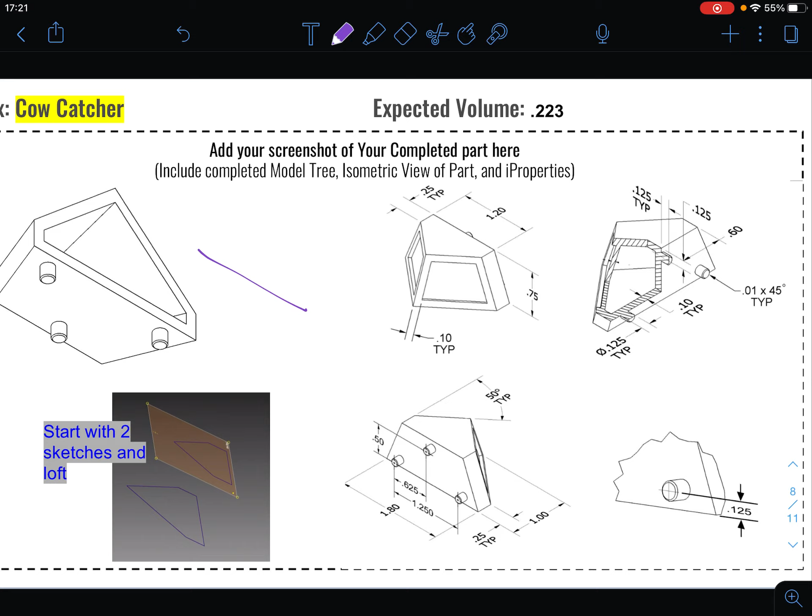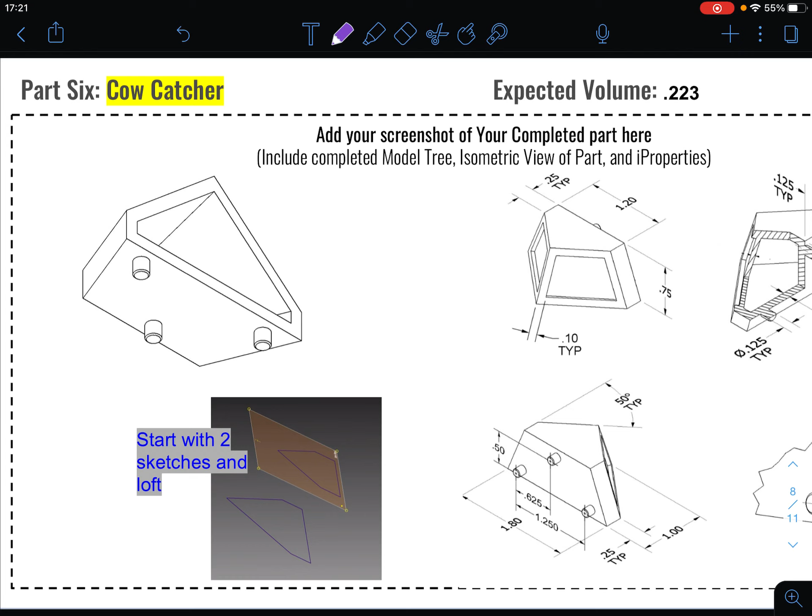Hello, future engineers. In this video tutorial, we are going to be going over how to model part 6, the cow catcher, inside of Onshape. There are other Onshape videos posted to the Google Classroom, so if you have questions about using Onshape, I'd recommend looking at those. I'm going to try to go through this one as quickly as possible because it's a bit more complex, so I want to keep this tutorial bare bones.

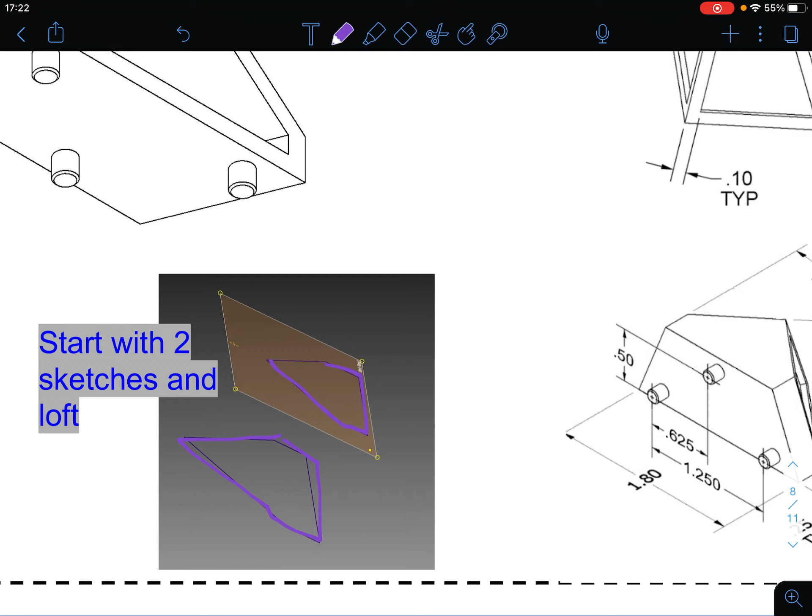Here we go. We are going to draw out two different sketches and loft them together. Typically I do not like to have an incomplete or unconsumed sketch before starting another one, but we're using Loft. From this preview, you can see we are going to draw two home plate shaped sketches, and then loft between them to fill in and create our cow catcher shape.

The first sketch we are going to be creating will use this width, this height, and these edges to fill in. It's got a width of 1.8, a height of 1.0, and the sides are 0.25.

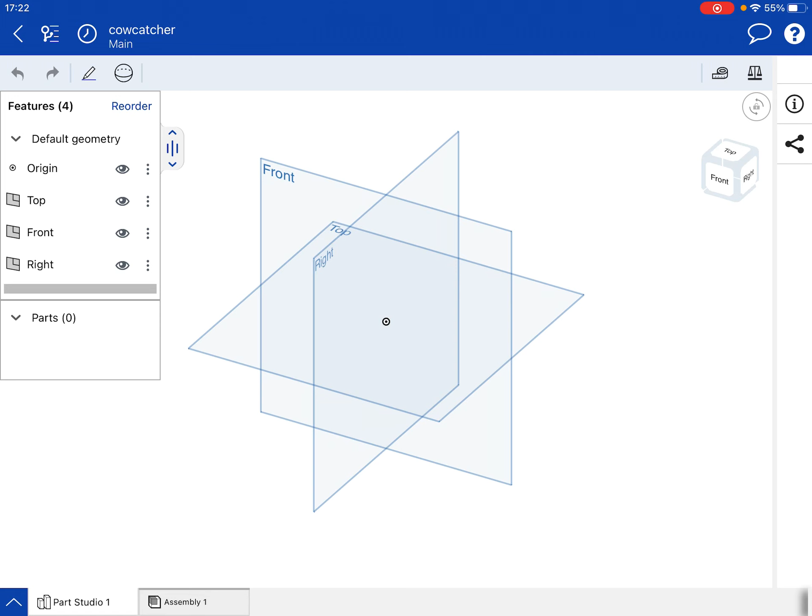So let's get into that. I'm going to go into Onshape and create a new part. This one I'm going to call cow catcher and click OK. The face that we're going to be starting sketching on is our top face, so I'm going to select that and hit the pencil icon to start sketching.

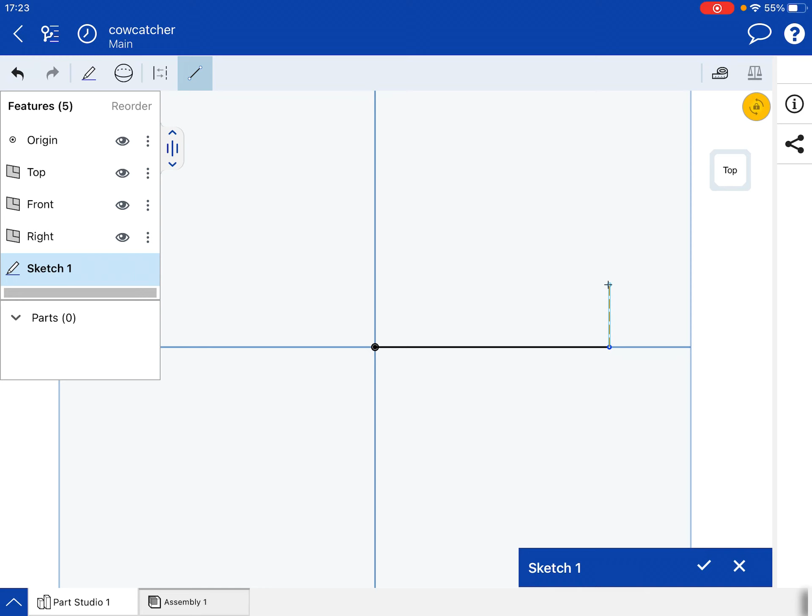Two finger touch to view normal to sketch plane, and I'm also going to hit the lock so I don't accidentally rotate this. I'm going to draw in my basic shape, and then go back through and dimension it.

I'm careful making sure things don't snap to each other in a way I don't want them to. I'm going to go over to dimension and choose the two outside edges, and dimension in between those at 1.8.

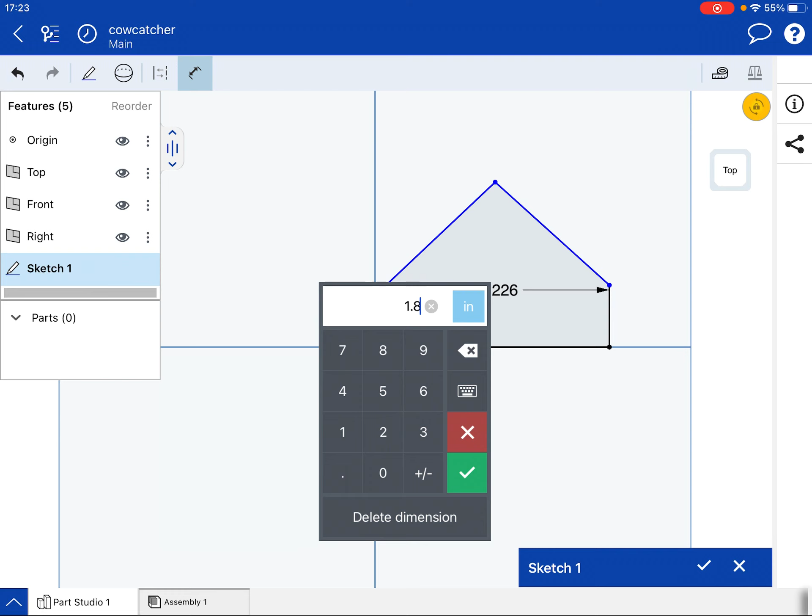Then I am going to dimension from that baseline to this top point over here. This dimension should be 1. The height of these lines, from this point to our horizontal baseline, should be 0.25.

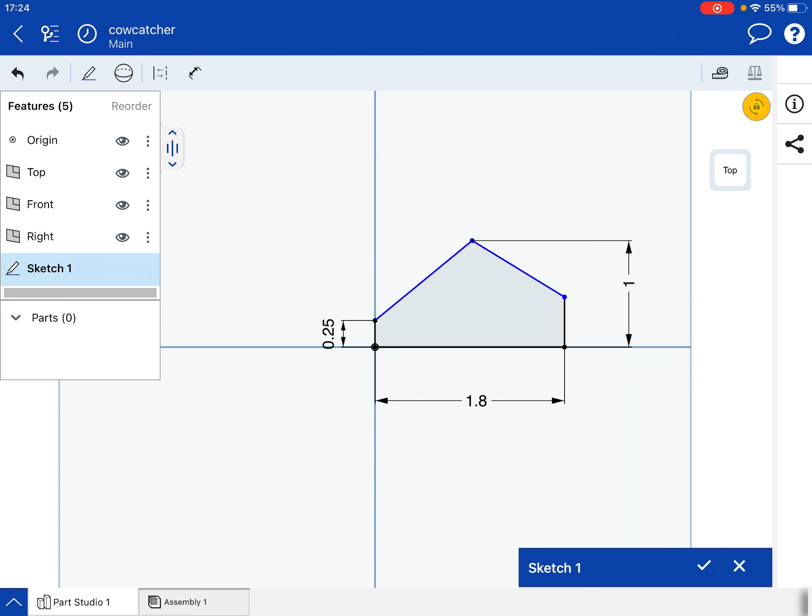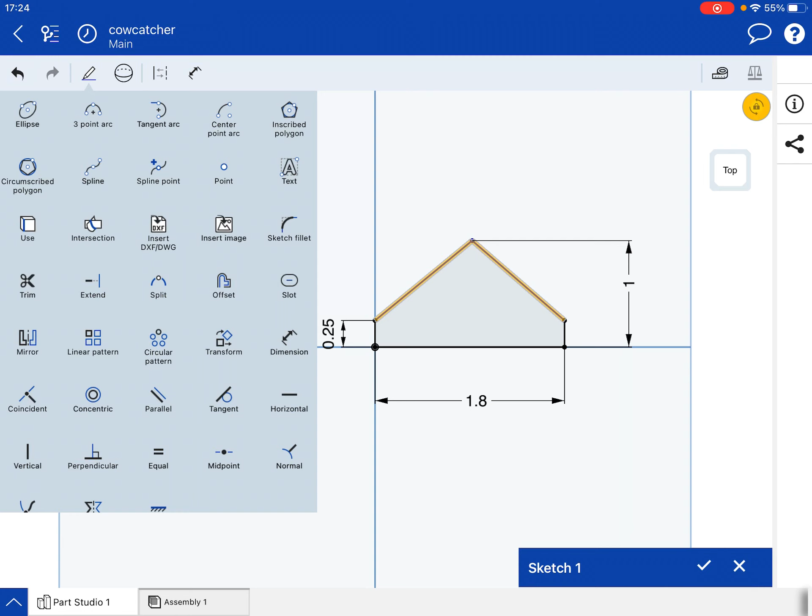Now, with all those dimensions in place, we actually have enough where we can just use some constraints. I'm going to highlight this line and this line and say that they are equal to each other, using the equal constraint. I'll do the same thing for the top two lines as well, selecting them and hitting equal.

That first sketch is done, so I'm going to go back to my isometric view. Typically we would extrude out this sketch, but because we want to loft between these two different shapes, we're going to keep that there. I am going to turn off my origin, front plane, and right plane just to make it a little cleaner.

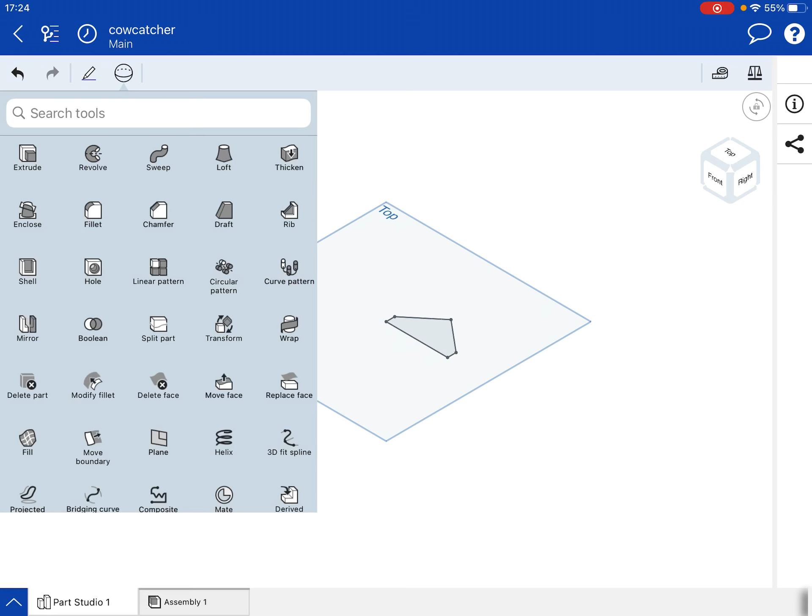In order to create our second sketch, we need to create an offset plane. I'm going to go into my 3D modeling tools and choose the plane command, then highlight the top plane I created, and offset it a distance equal to the height of the cow catcher, which is 0.75. I'm going to click OK.

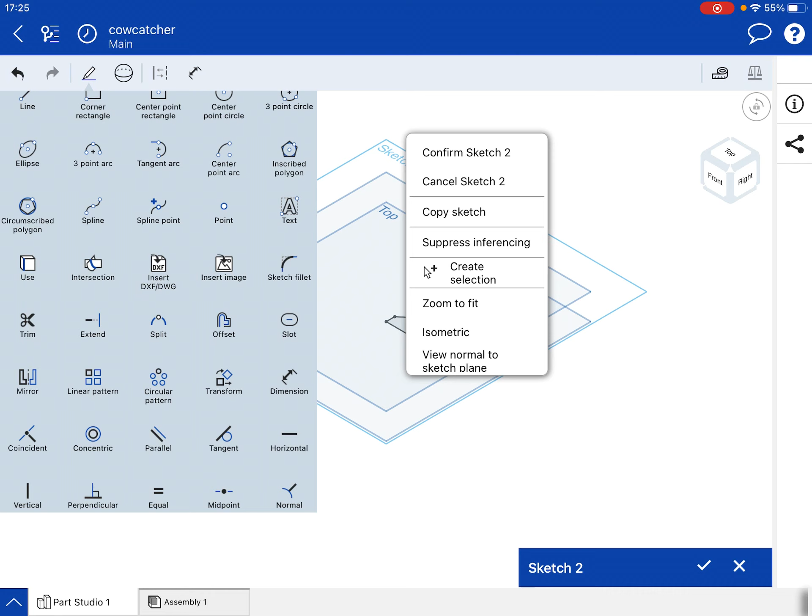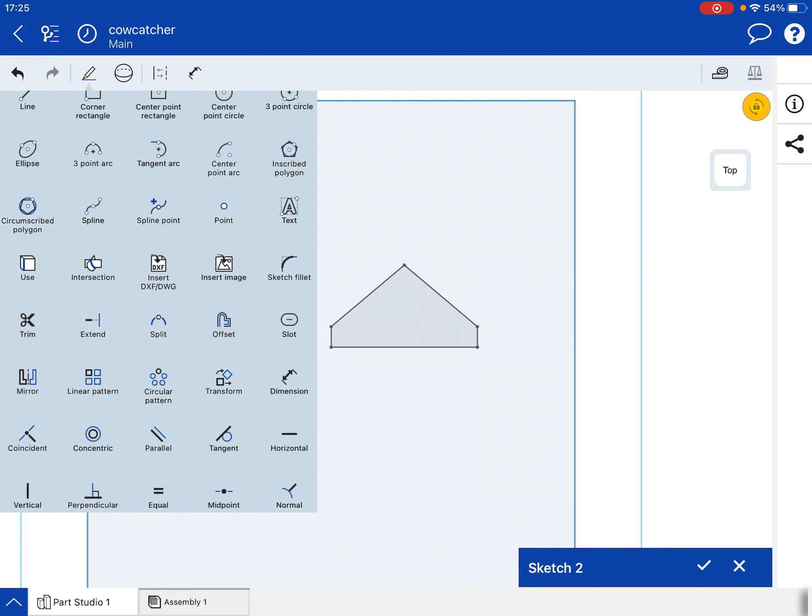Now I'm going to start a new sketch on that new plane and view it normal to plane. Let me rotate this around a little bit... view normal to sketch plane. Oh, I have it upside down. View normal to sketch plane again. Perfect, hit the lock. Now I am not going to draw my sketch right on top of this; I'm going to wait to constrain it later.

I am going to draw in my second home plate looking object above, and then I'm going to constrain them in place. This is just going to allow me to keep it a little bit more organized, so I don't accidentally constrain something to a place I don't want it constrained to.

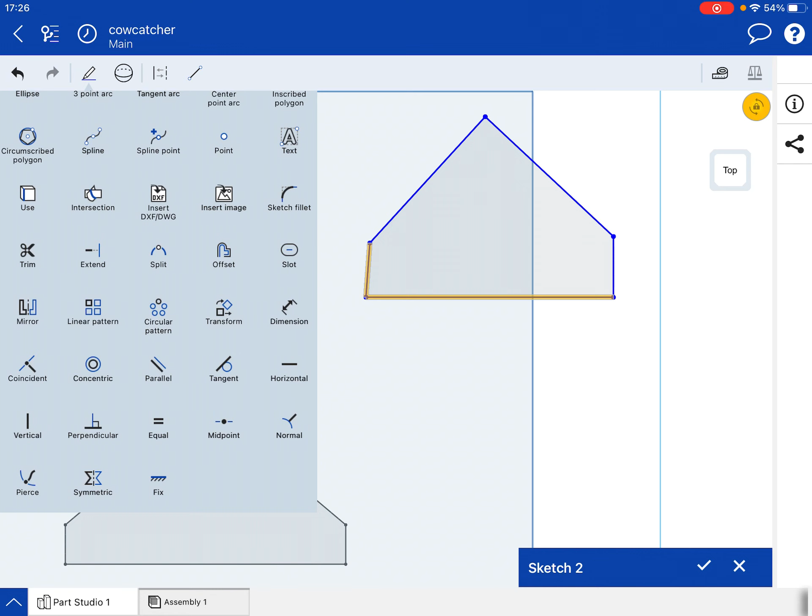Speaking of constraints, I want to make sure these two lines are perpendicular, since I didn't draw them that way. So I'll highlight both of them and apply my perpendicular constraint. Nice, now let's get into dimensioning this up.

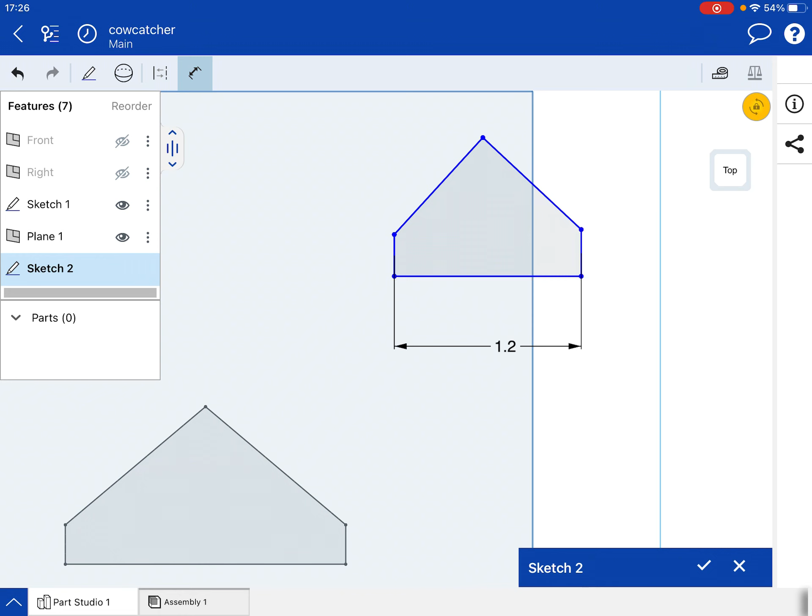Our overall width, from the left vertical line to the right vertical line, is a distance of 1.2. Our side edges are still that distance of 0.25. But what changes in this one is that we do not actually get a height for our sketch. Instead, we get an angle.

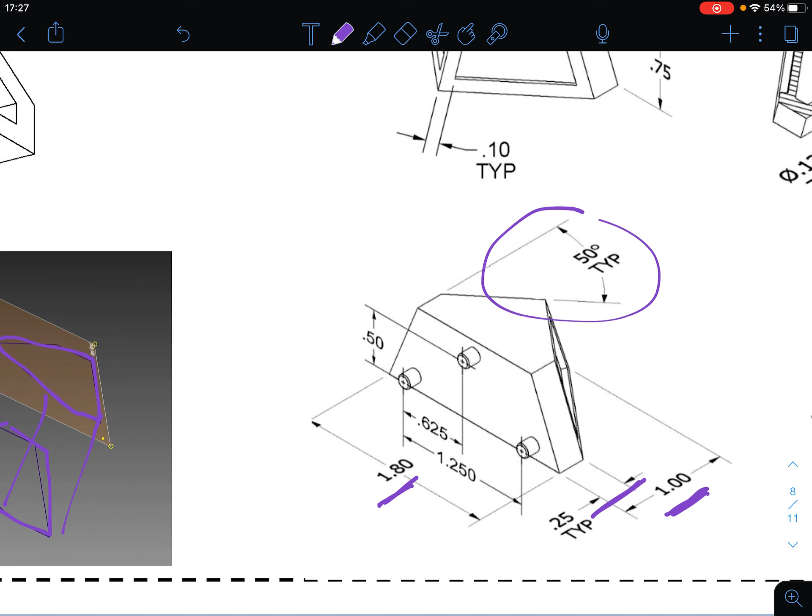So I'm going to select my two lines that are 0.25 and set them equal to each other. If I want to fill in the 50-degree angle that we can see inside this sketch, for our top face, I need to have a construction line over here.

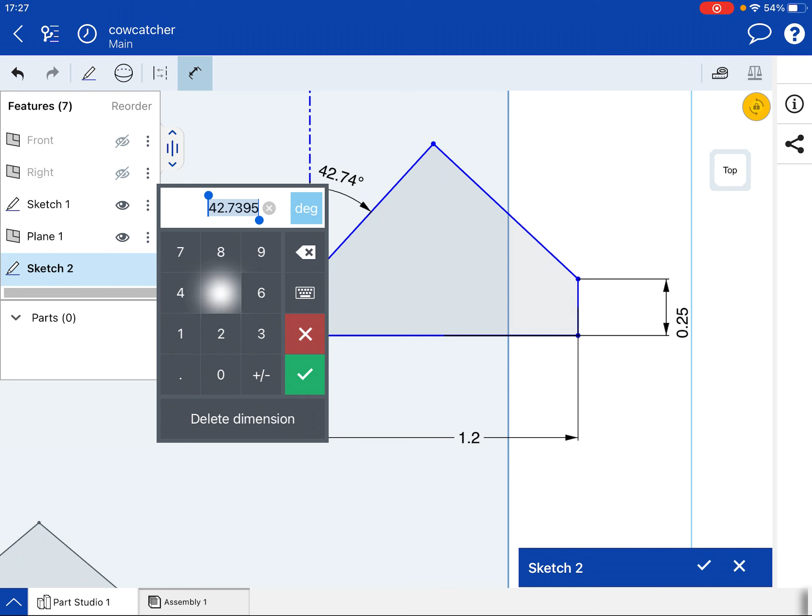So I'm going to go into Onshape and turn on the Construction tool. With that selected, I can draw a perfectly vertical line, and then throw in a dimension between this diagonal line and my construction line, setting that to 50 degrees.

With that in place, I can select both of my diagonal lines and set them equal to each other. Ooh, sketch could not be solved. We'll see, maybe I had something snap into place.

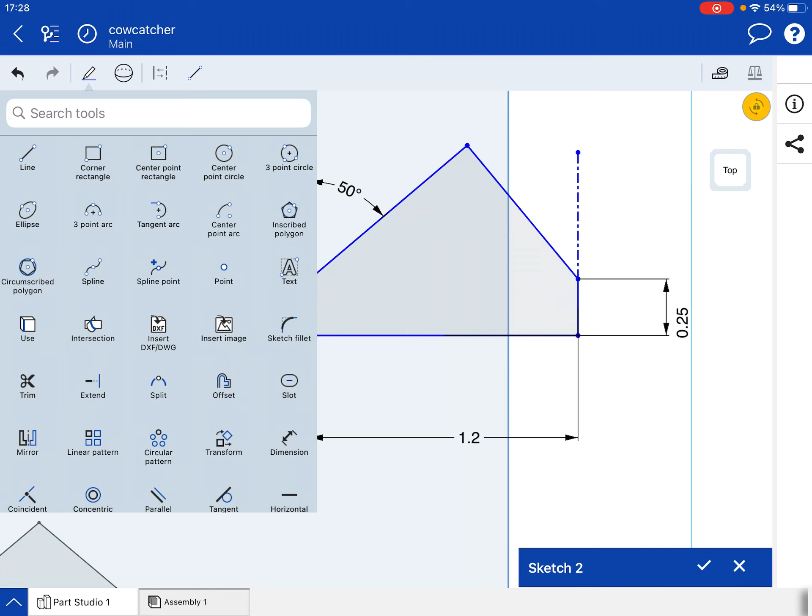So instead, we're going to use that same construction line method over here and see if I have something overly constrained. One of the reasons I moved it to the side was to avoid this, but we'll see.

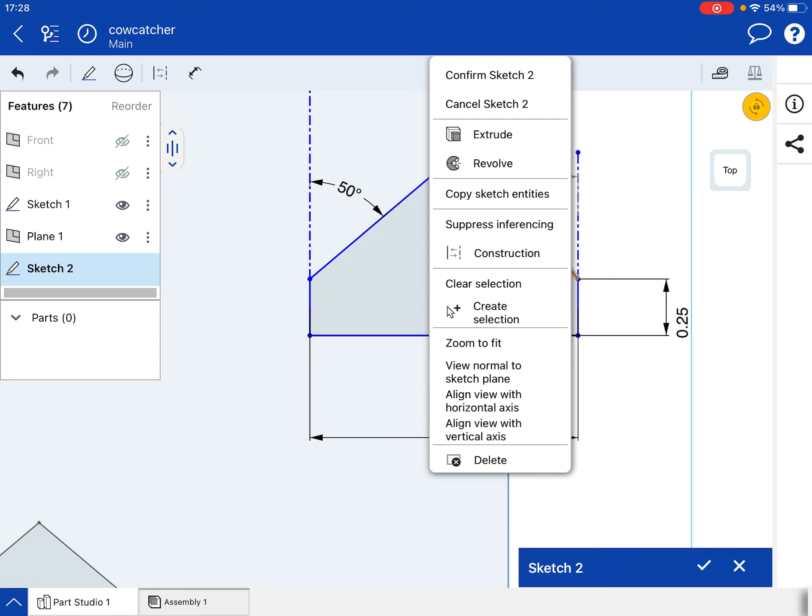Ah yes, it is overly constrained, and that might be a perpendicular constraint between these. I am going to delete that line. There we go. And now I can move this line, and it seems to be fine.

So I'm going to draw in a new line. That might have just been where I had placed it. Now we'll try that equals, but I need to select both of the lines first. So I'll select this line, and hit equal. There we go. I just had an extra constraint.

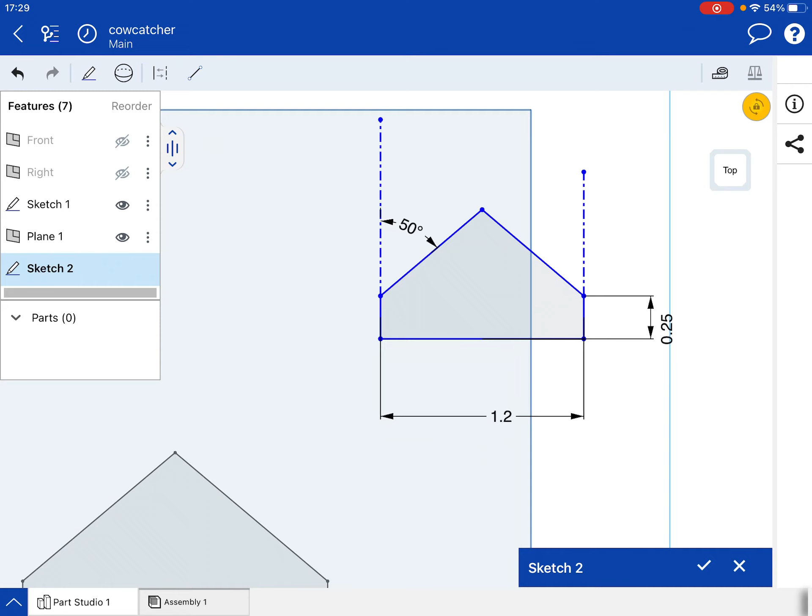All right, so now I want these to line up on top of each other. In order to do that, I'm going to place a point at the midpoint of each of my drawings. When I try to place a midpoint over my original sketch, it won't allow me to place anything there because it has no reference.

To quickly make a reference, we're going to go into our sketching tools and pick out the Use function, similar to Project Geometry in Autodesk Inventor. With the Use function, I'm going to highlight this bottom edge, bringing that into my sketch. It's subtle, but it's now there.

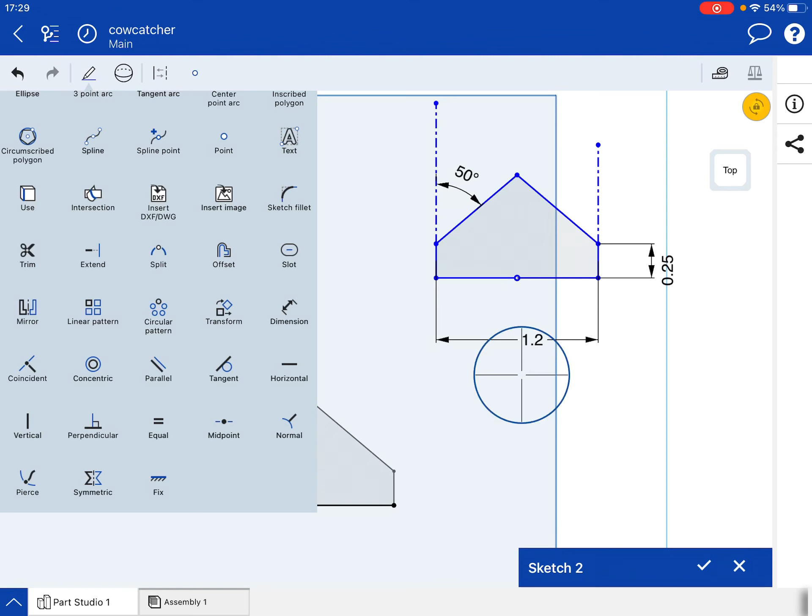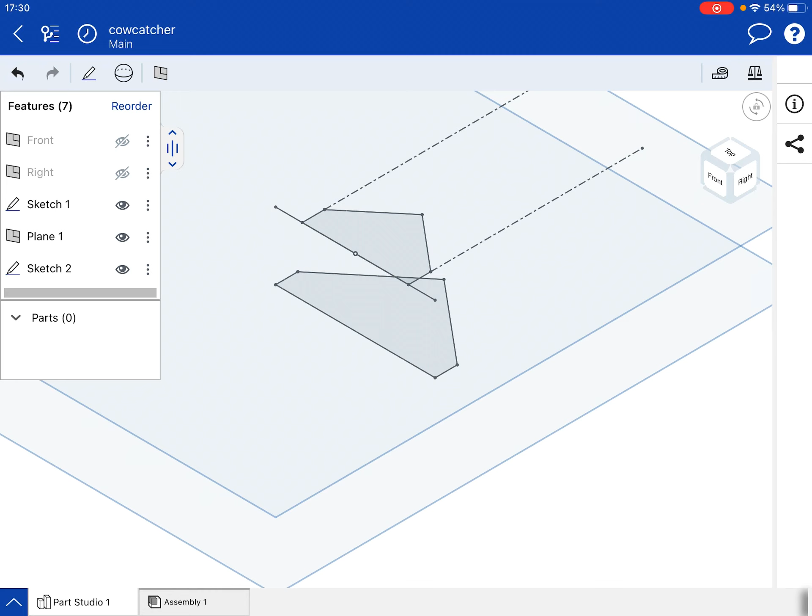And now I can place a midpoint right there. Now that I have those two midpoints, I'll highlight both of them, this one over here and this one over here, and apply my favorite constraint of all time, coincident. Now they're constrained together, and I can hit check. I'll view isometric, and you can see I now have these two sketches stacked on top of each other. Yes, I could have trimmed it up a little bit, but that's fine.

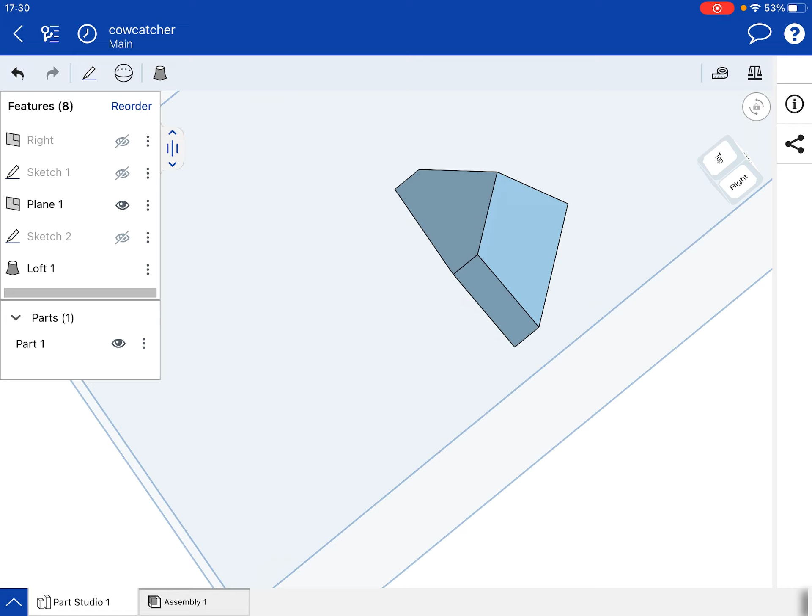Now I'm going to hit extrude. Oh whoa, sorry, not extrude, I want to loft. I'm going to choose the Loft command and select the two sketches I want, this one over here and this one over here. Lofting between them, I now have the base of my cow catcher.

I'm going to go back over to my isometric view, and turn off these planes. I don't need them anymore. Perfect. So we want to have a hollow cow catcher, so we want to hollow this out.

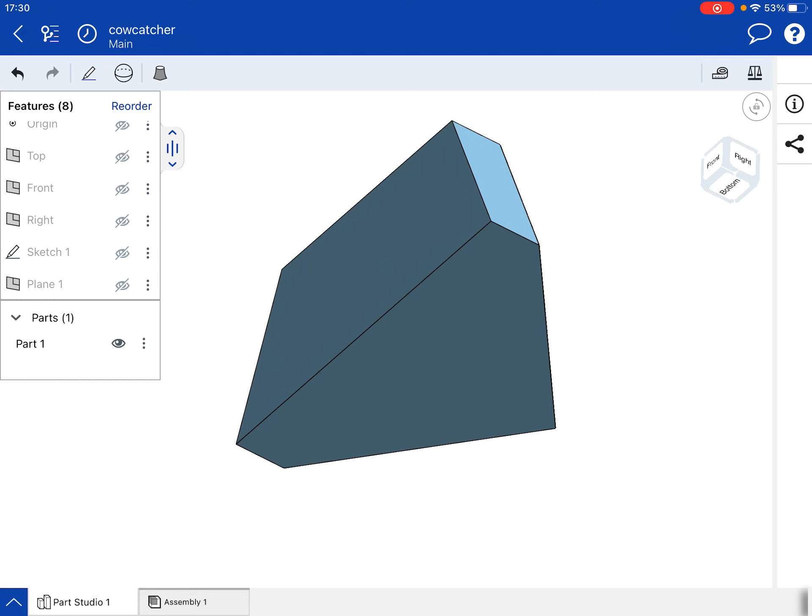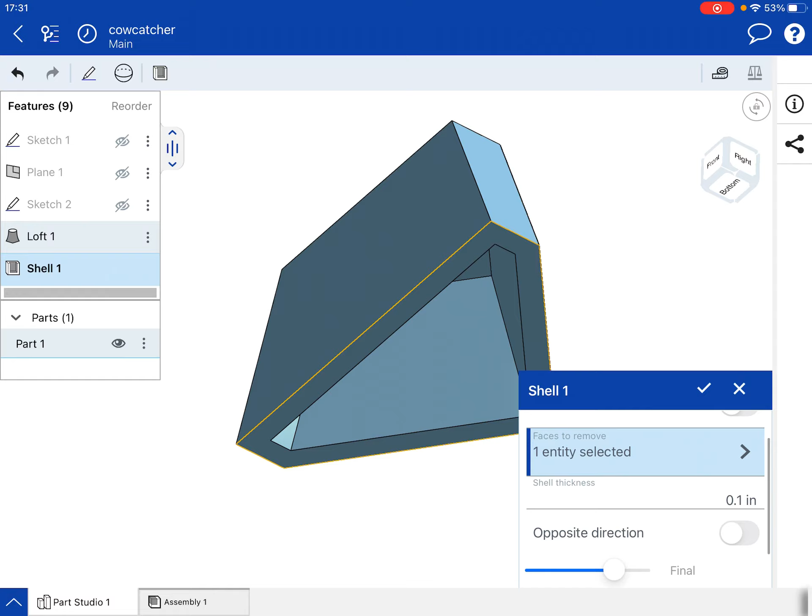It's important that we do this step next, because otherwise we could run into issues trying to hollow parts once we have extra features added to them. So I'm going to go into my 3D modeling tools and use the shell command. With the shell command, we don't want to totally hollow something, we want to remove a face. We want to remove this bottom face over here, so I'm going to select that, and it's now removed. It's actually removed at the shell thickness we want, which is 0.1 of an inch. I'm going to hit check, and we're done with that. It was really easy to do, and now we have this Lego-like structure where it's mostly hollow on the inside.

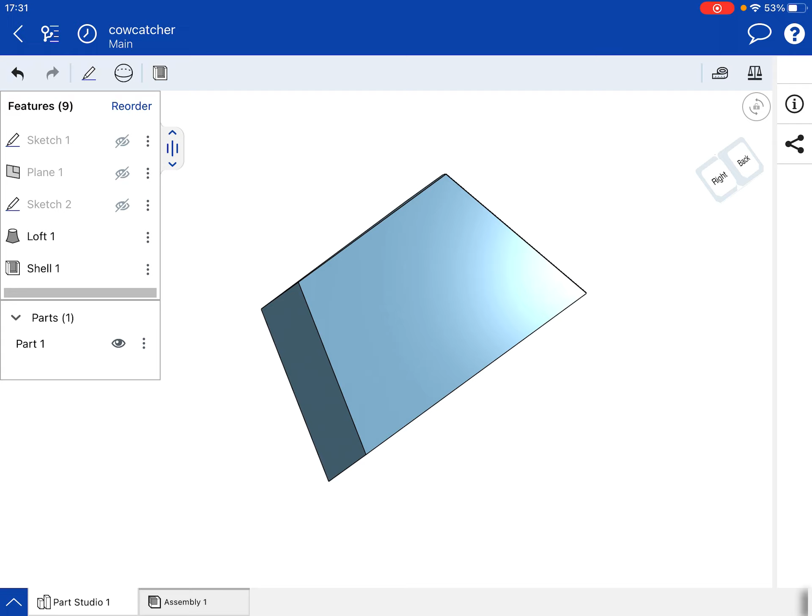I'm going to go over to my isometric view, and now the next thing we're going to do is add on these face plates, because they're a little bit difficult. If I want to draw in this face, I'm actually going to totally subtract out this rectangle. It doesn't look like it inside of the schematic, but if we look at the volumes when we're done, the closest way to get to this number is to subtract it all the way through.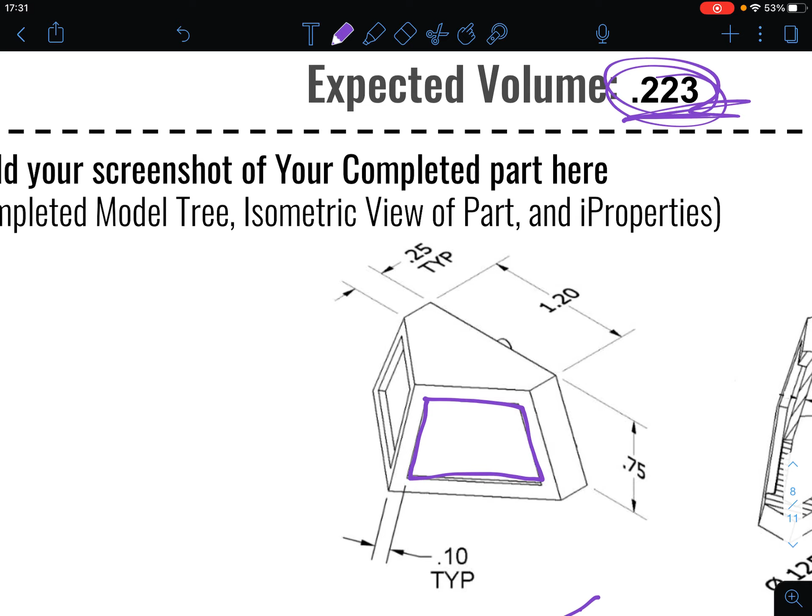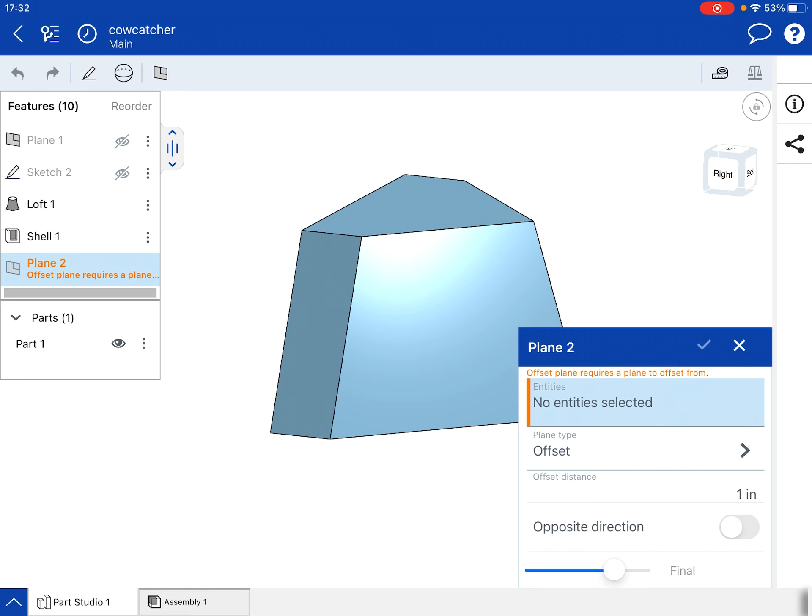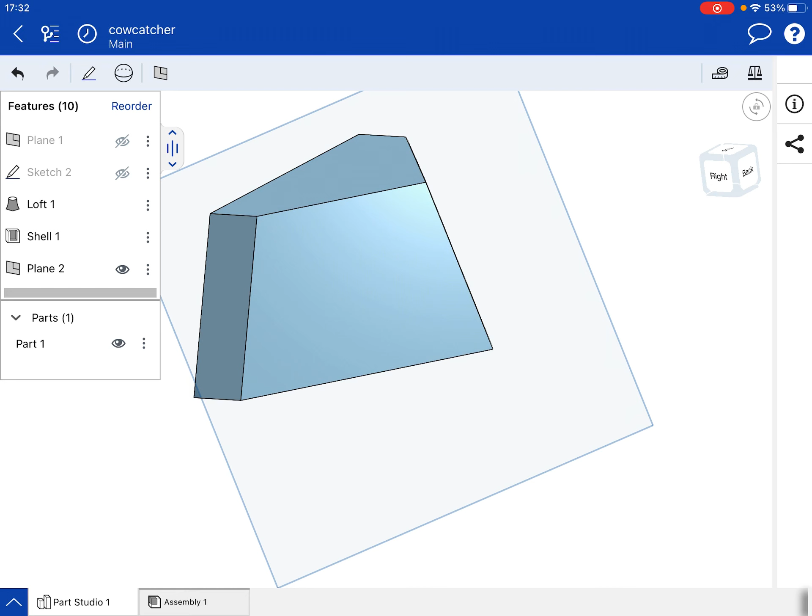Now, if I want to sketch on this face, I'm going to have some issues because of the loft. Sometimes when using lofts, weird things happen. If I try to sketch on it, I can't. I can sketch on this top face, this side face over here, but I can't sketch on this face. So we're going to go into our 3D modeling commands and create a plane, but not any kind of plane - we're going to choose a 3-point plane. Our 3-point plane will allow us to create a plane that is parallel to our lofted surface and then sketch on there. So I'm going to choose these 3 points on this face, and hit the check mark. I now have this sketching plane that I can sketch on.

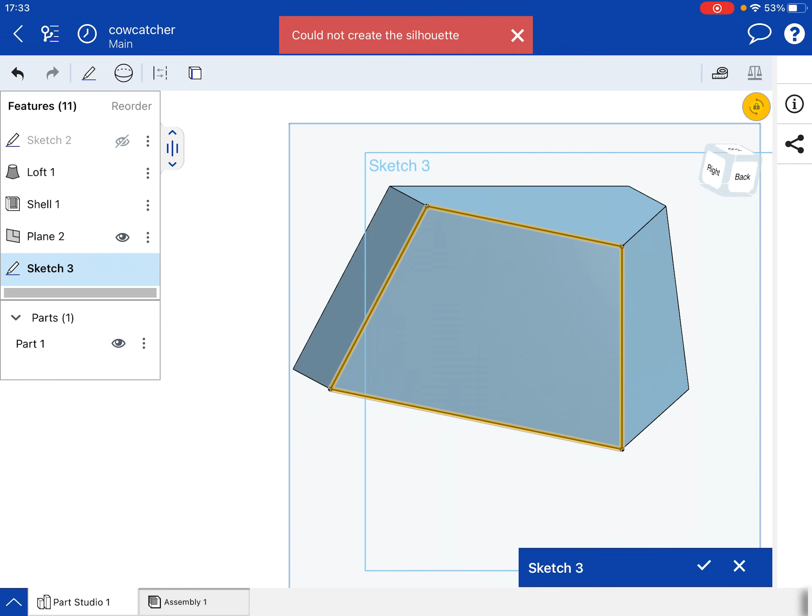With that plane, I'm going to view normal to the sketch plane, and lock my rotation. I'm going to use that Use command again and select each of my edges. Now I'm going to go again and select all those edges, and offset them inwards. So with all those selected, go back into my sketching tools, choose offset, and we want to offset them inwards a distance of 0.1.

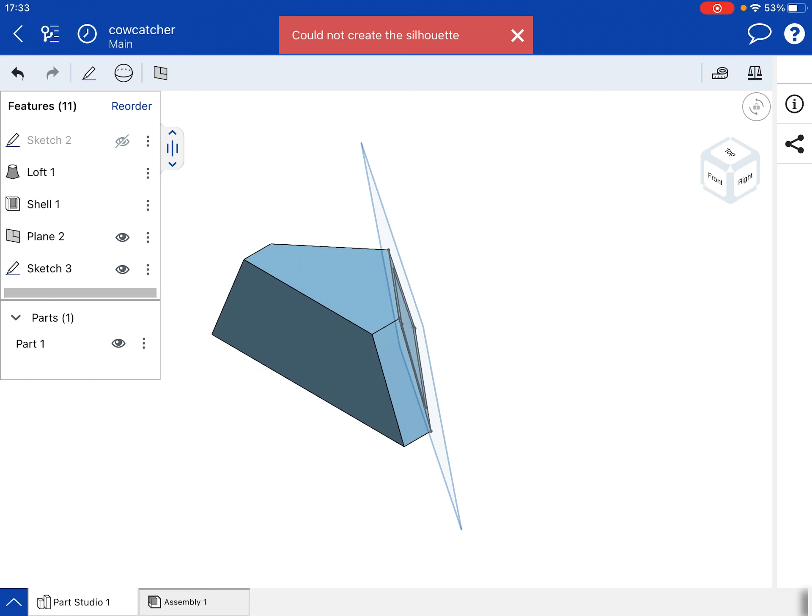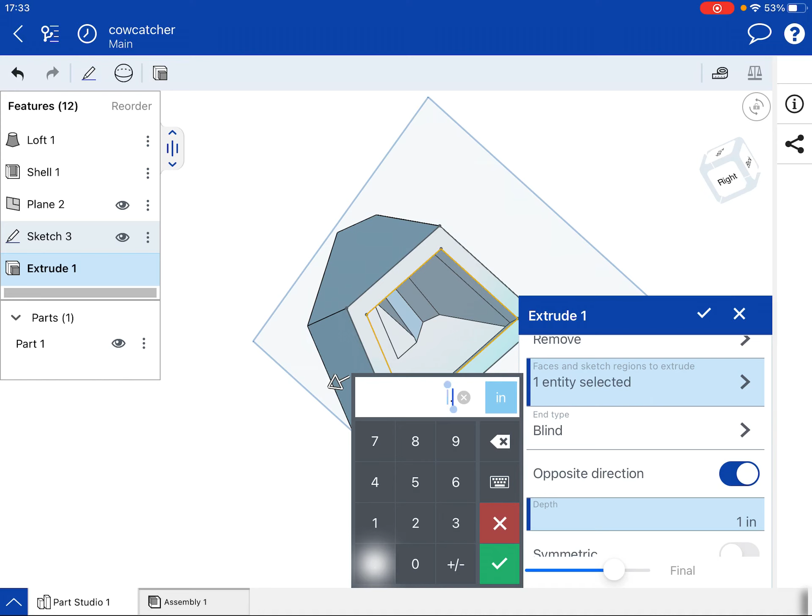I'm going to hit my check mark and go back to my isometric view so I can see it when I go to extrude this. For the extrude, I want to choose this face right here, and I don't want a new face, I want to remove. So we're going to remove, but we don't want this to go all the way through, otherwise we'll cut through our object. We're going to go at a depth of 0.2. Hit the check mark, and there we go - you can see it totally got subtracted out. I'm going to hit the check mark, turn off that sketching plane, and go back to my isometric view.

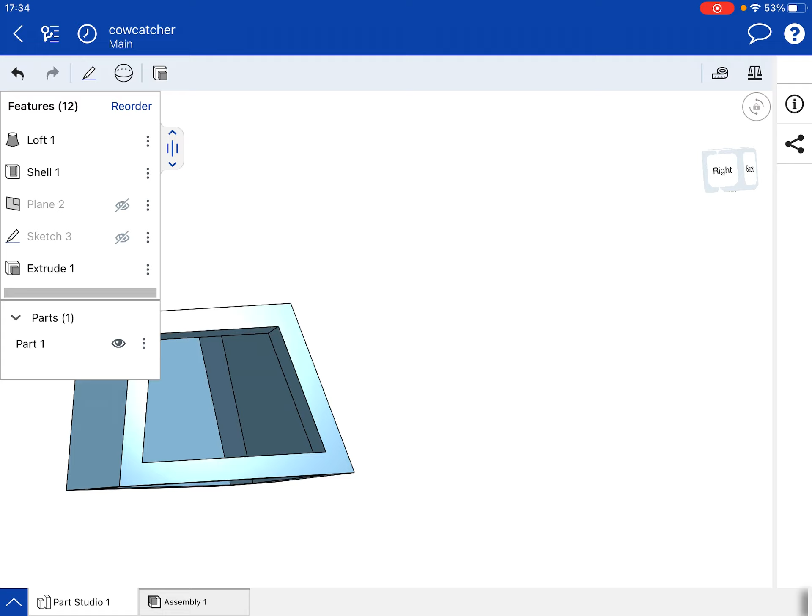Perfect. We now have that cut out, but we want to have it cut out on both sides, so we're going to do a little bit of a shortcut using that plane command again. Inside my 3D modeling tools, I'm going to choose plane, and this time we're going to choose a mid-plane. I'm going to choose this outside edge and this outside edge, and you can see it made a little plane in the middle, kind of looks like a mohawk over there.

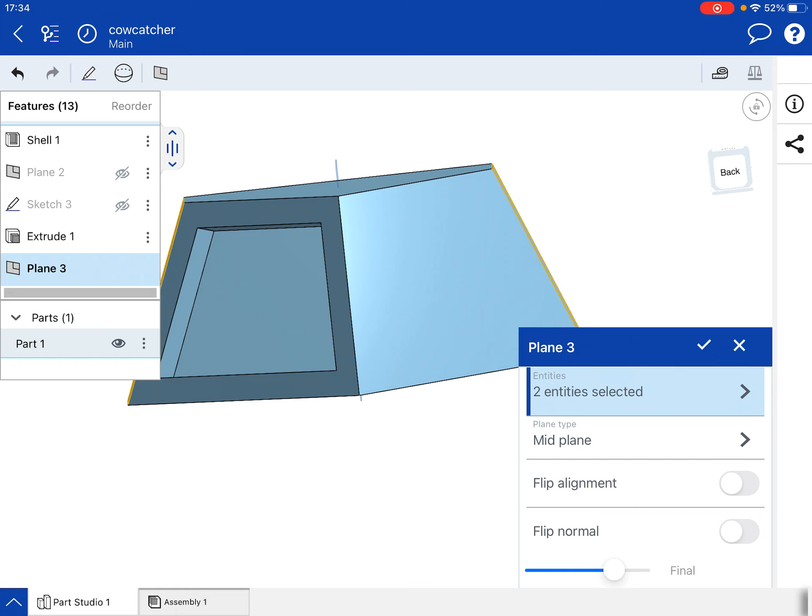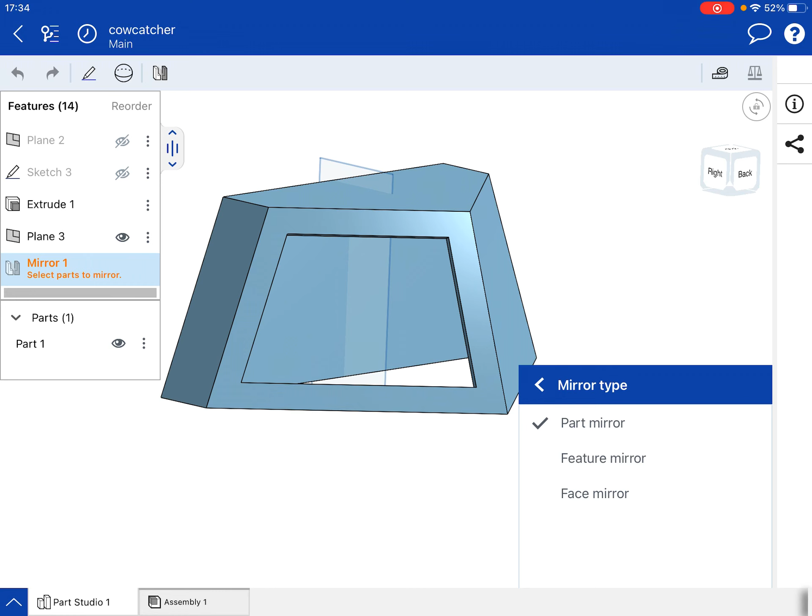I'm going to hit the check mark, and now that allows us to mirror a feature. So inside of my 3D modeling commands, I'm going to go over to Mirror. With mirror selected, we don't want to choose a mirror type of part. The part we're creating right now is a full part. We want to just mirror a feature.

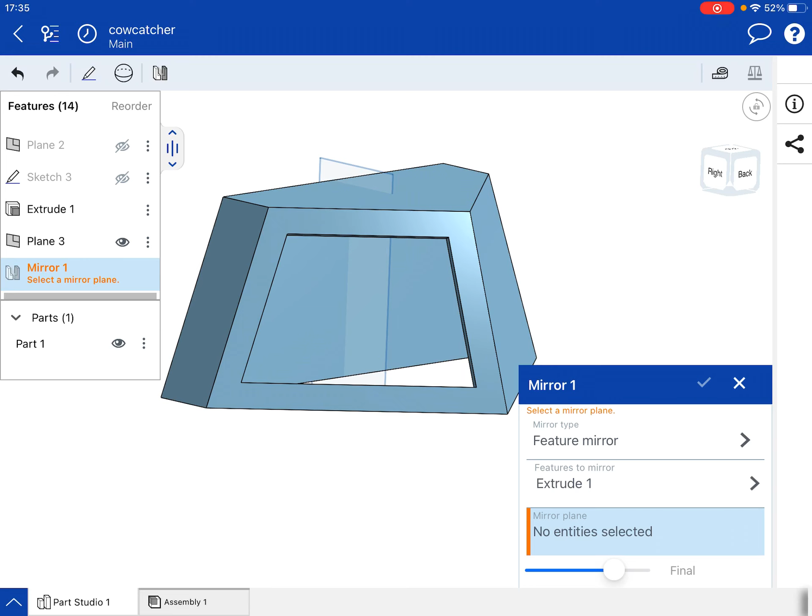I'm going to work inside of the model tree because it's a little bit easier to select these. I'm going to choose Extrude 1 as my feature, then go over to where it's orange on the side and select my mirror plane, which should be Plane 3. With those selected, I'm going to hit my check mark, and you can see both of those faces have been removed. Cool.

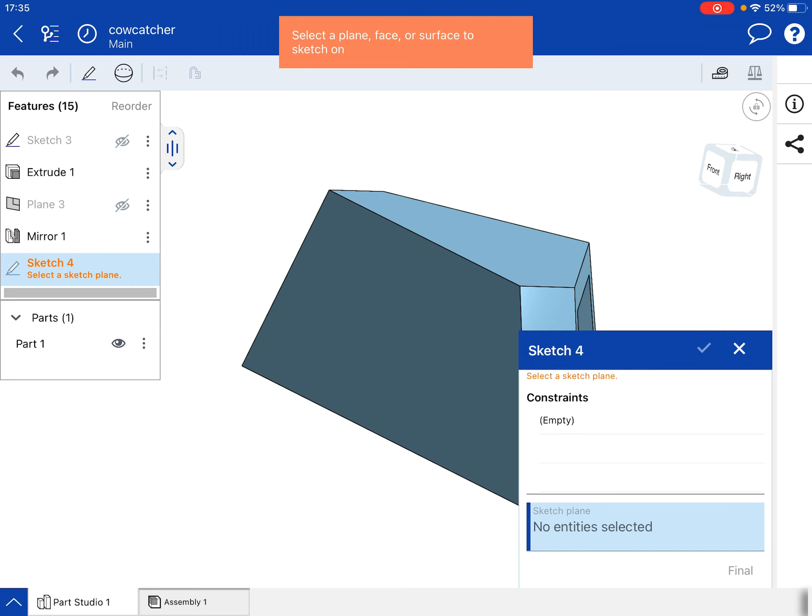I'm going to turn off that mid plane, and now the last thing I have to do is create those little pins that stick out of the back. So I'm going to choose a new sketch on this back face and view normal to that sketch plane.

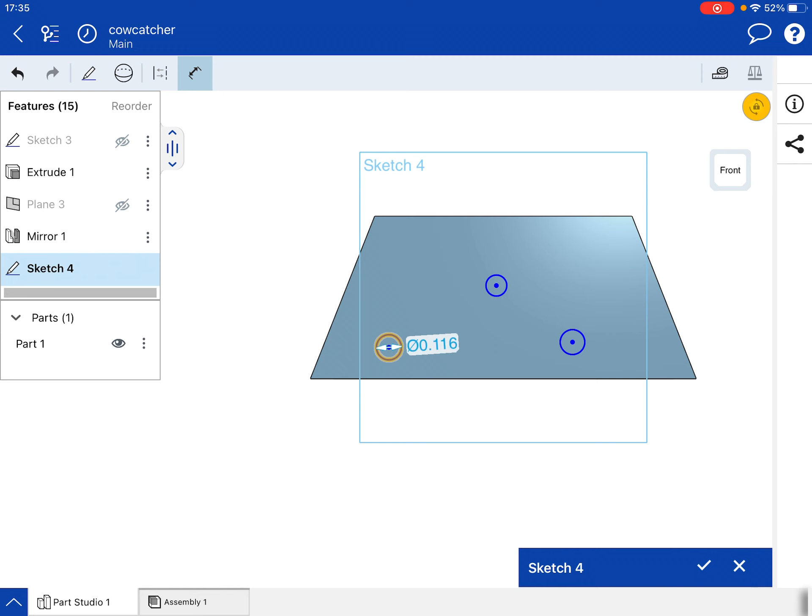I'm going to draw in 3 circles. Each of these circles has a width of 0.125, so let's dimension those up. 0.125. Dimension this one at 0.125. And then our last one over here. Wow, it's pretty close on drawing that one, 0.125.

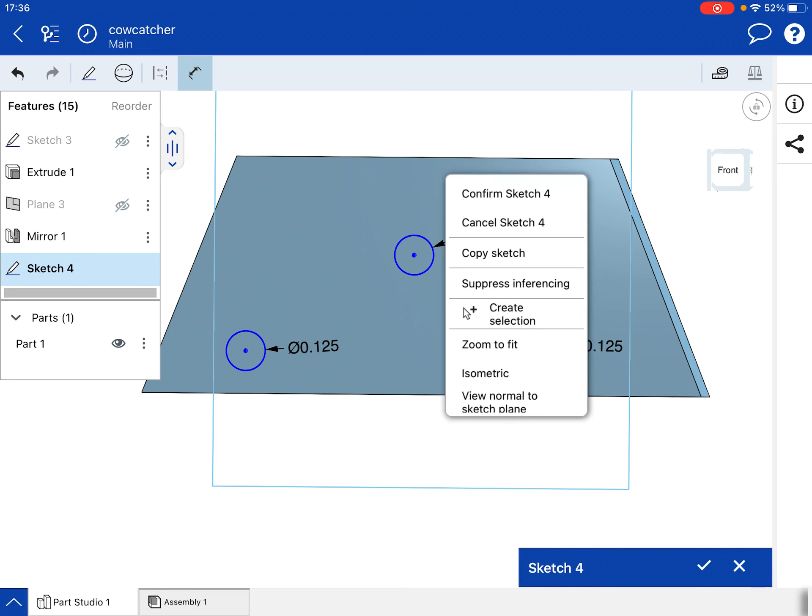All right, go back to normal to plane. The bottom 2 are at a distance of 0.125 from the edge. We've got a lot of 1/8 of an inch dimensions. Cool.

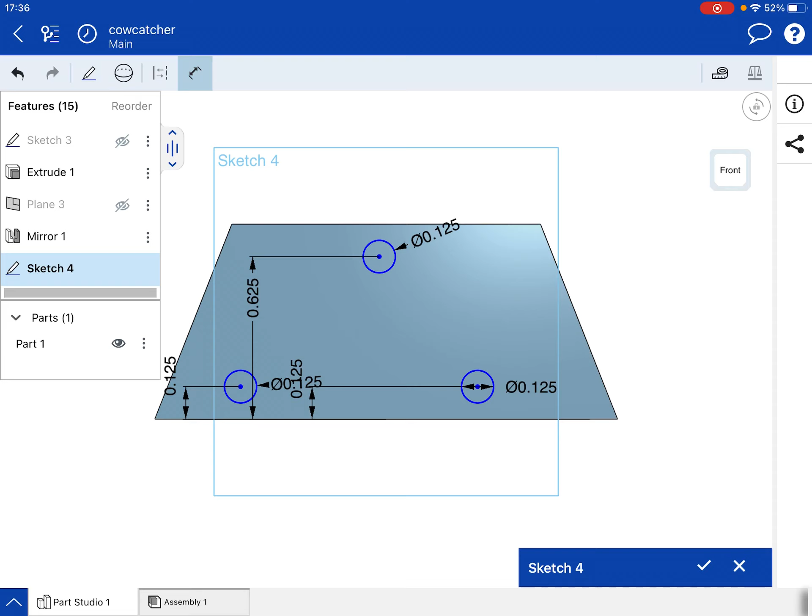All right, now this point is 0.625 from our edge, I believe, or it's 0.5 maybe. Let me double check. Oh, it's 0.5. It is 0.5. So I'm going to turn off the dimension, double tap on my previous, and then hit 0.5 to edit that dimension.

Cool. Now that top one is a distance of 0.6 from my top corner over here. Now Onshape automatically wants to do aligned dimensions, which I don't totally understand. So you need to click and drag on the dimension straight up so that we can hit in 0.6 as just a totally horizontal dimension.

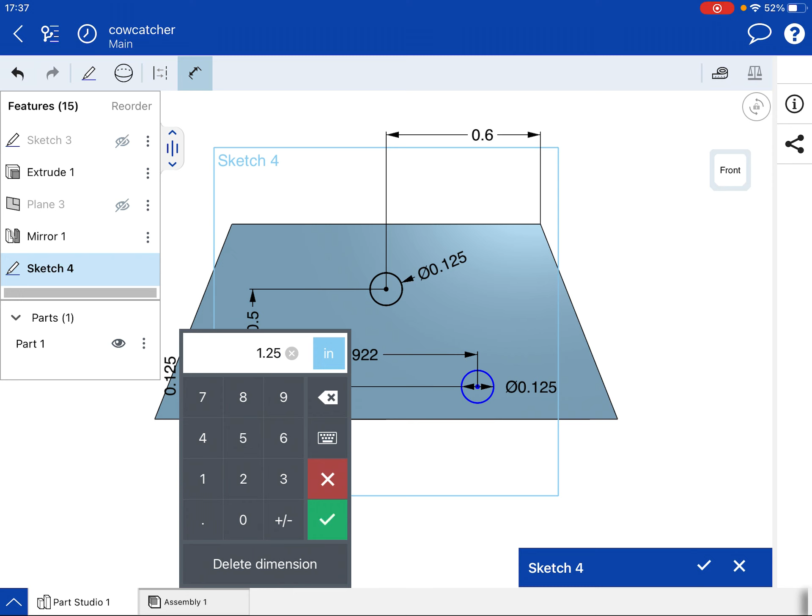Then our distance between our two dots at the bottom, that is a distance of 1.25. And our distance between the center point of one of our top dots and one of our side dots, we need to click and drag this down again, that is the dimension that is 0.625. I knew it was somewhere. Cool, those are all lined up.

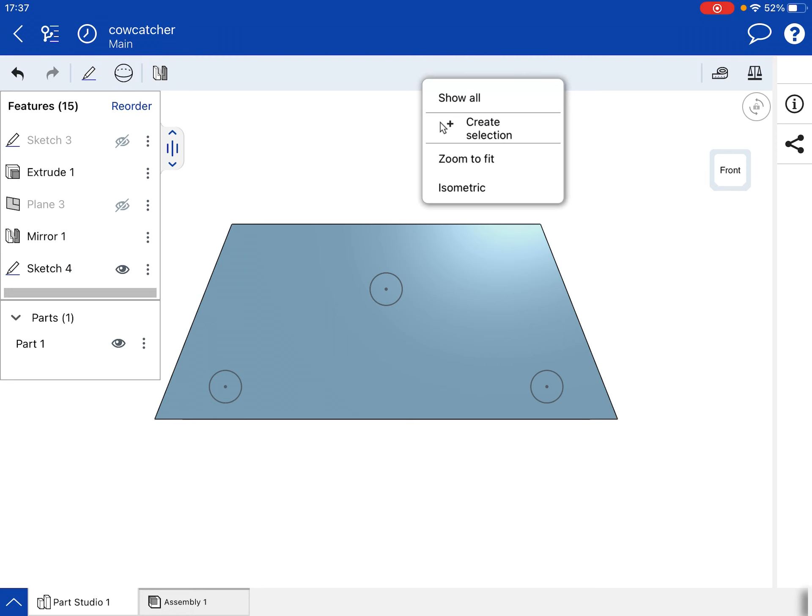I'm going to hit my check, go back to my isometric view, and get ready to extrude those 3 features. So those we are adding, we want to extrude a depth of 0.125, and we're going to hit the check mark.

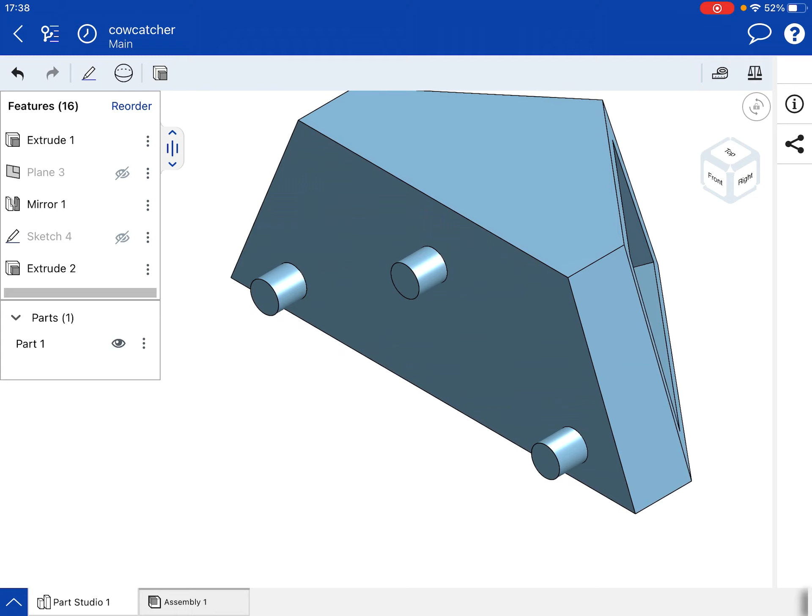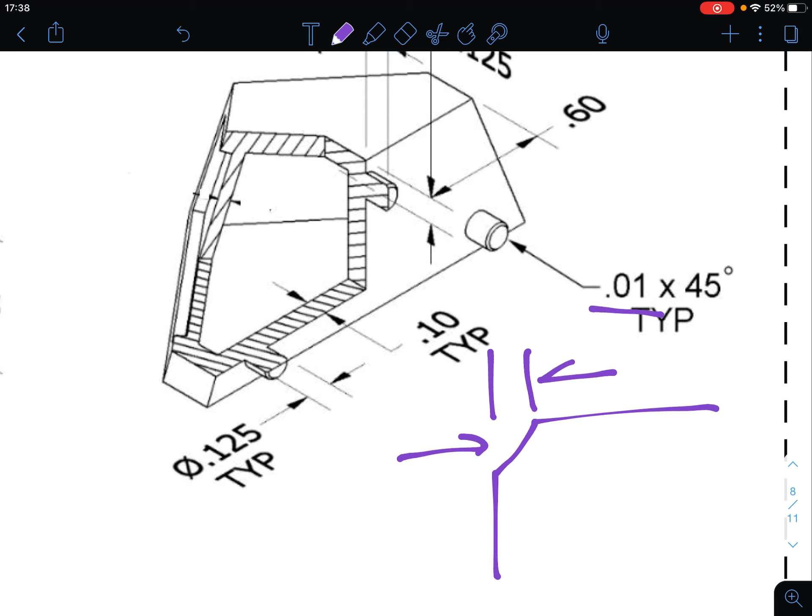Now there is this little feature that is included on all of those. You can see right here, it's 0.01 typical. That means it's got a chamfered edge, or an edge that if we were to zoom in on, has this little angled bit on it. So what that's saying is it's 0.01 to that edge, and then it's 45 degrees. So essentially both edges are the same length.

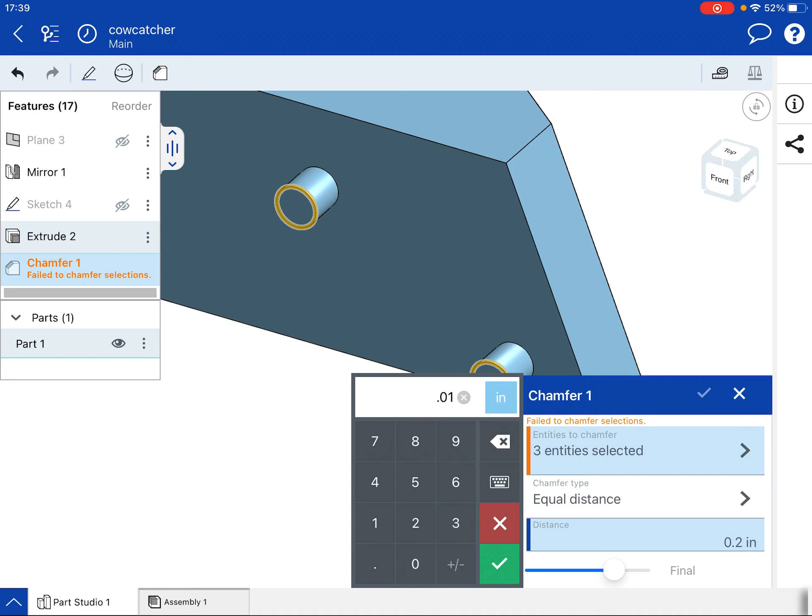So inside of Onshape, I've got to go back in here over to Cowcatcher. What I'm going to do is go to my 3D modeling tools and choose Chamfer. It works similarly to fillet, so I'm going to choose all the edges that I want, and equal distance is our chamfer type, and we're doing 0.01. With all those selected, I hit my check mark, and we're done. That's it. That looks great.

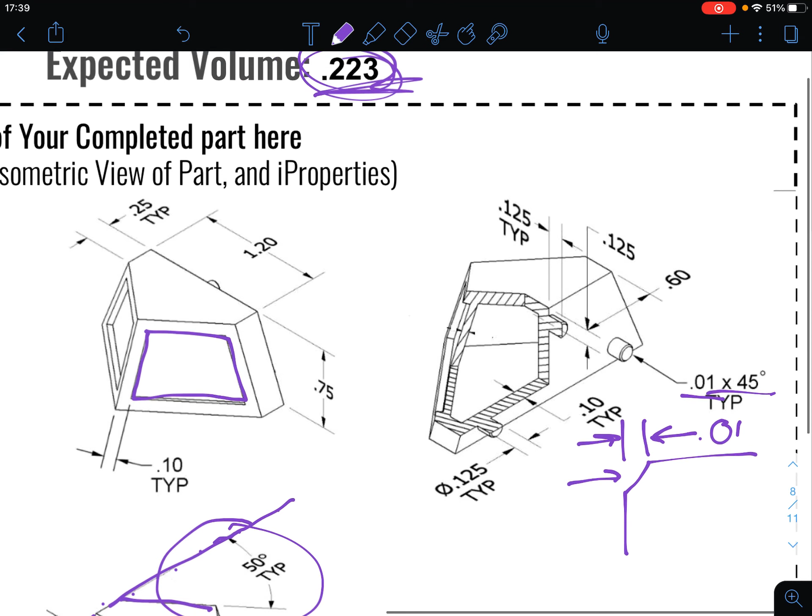I'm going to go over to my scale for my mass properties, and then hit part 1. We got a measurement of 0.222. It's slightly, ever so slightly, 1/1000th of an inch off of our answer key, but it's close enough.